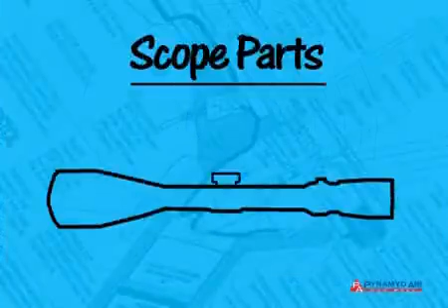It may be next to impossible to adjust the scope enough with its internal adjustments to get the aim point and the shot to coincide. We covered how the reticle works inside a scope back in episode 11. You learned that the reticle is housed inside an erector tube, which allows for adjustment in both directions.

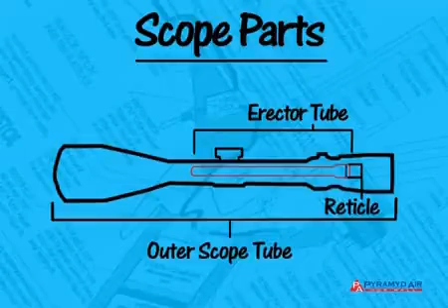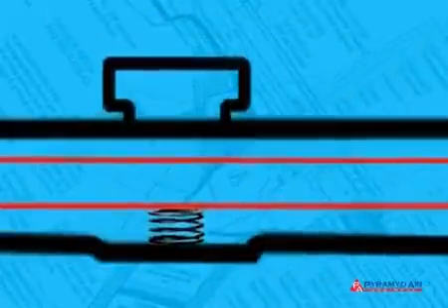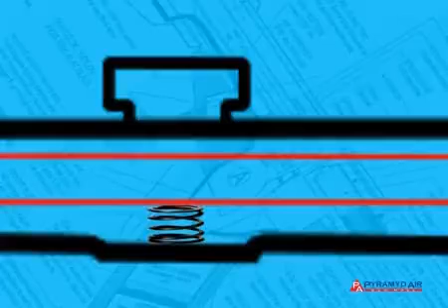The erector tube, which is inside the outer scope tube, is under spring tension that opposes the scope knob adjustments. When the adjustment knobs are turned, they move the erector tube either against or away from the tensioning spring. To get the pellet to strike where the crosshairs of the scope are set, the shooter has to adjust the scope's internal vertical elevation knob upward.

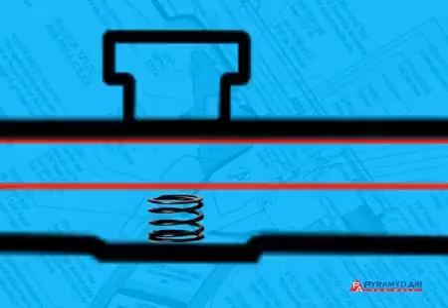There's a point where the tensioning spring, which presses against the erector tube, fully relaxes. When that happens, the erector tube is free to move around from the vibration of each shot, and the scope will no longer hold a zero. This is very important to remember because this is the most common cause for accuracy problems.